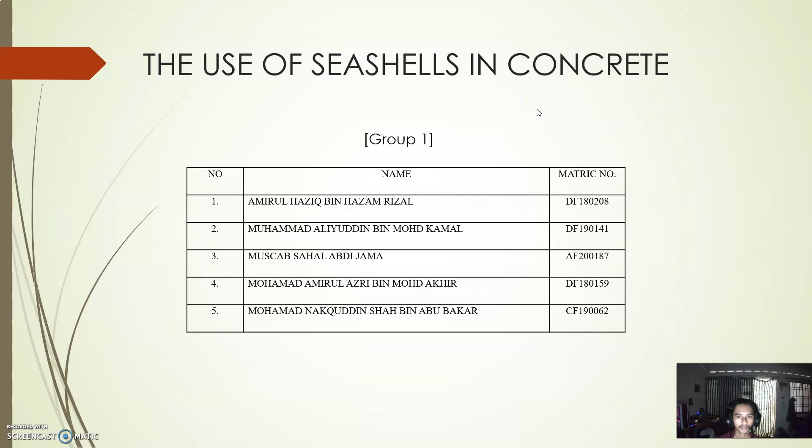For the introduction, concrete is one of the two most used structure materials in construction. Every year, the use of concrete increases by 2 tons for each person. So in order to reduce reliance on raw material in concrete production, green concrete has been promoted.

Green concrete is concrete that has been produced using recycled or waste natural materials. One of the ways to produce green concrete is by using modified cement. Cement is the second largest volume material used by human beings after water. Cement plays the role of a binder, which is a substance that sets and hardens and might bind alternative materials together.

During production of cement and the hydration process of cement, the amount of carbon dioxide emitted by the industry is nearly 900 kg of carbon dioxide for every 1000 kg of cement produced. This carbon dioxide production causes serious environmental damage.

Seashells have high potential for use as partial cement replacement and concrete filler. The calcium carbonate content of the seashell is around 90%, which is comparable to the calcium carbonate content of limestone dust used in Portland cement manufacturing.

Seashell crystal formations are mostly made up of calcite and aragonite, both of which have higher strength and densities than limestone powder, the original material. Furthermore, the particle size of the seashell ranges from 36 to 75 microns, which is comparable to the particle size of Portland cement.

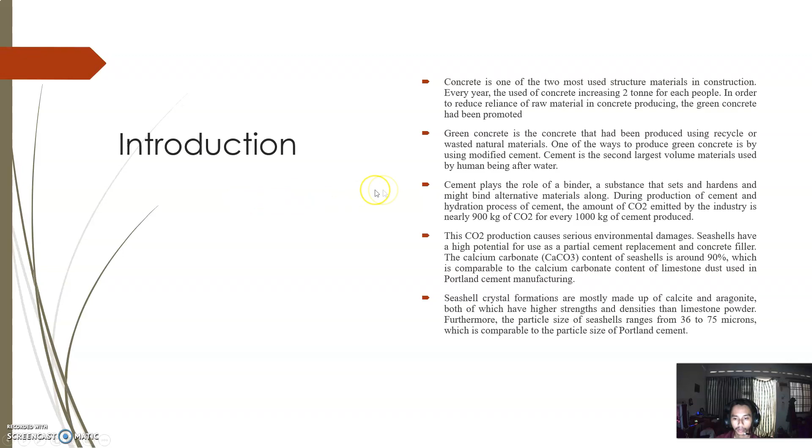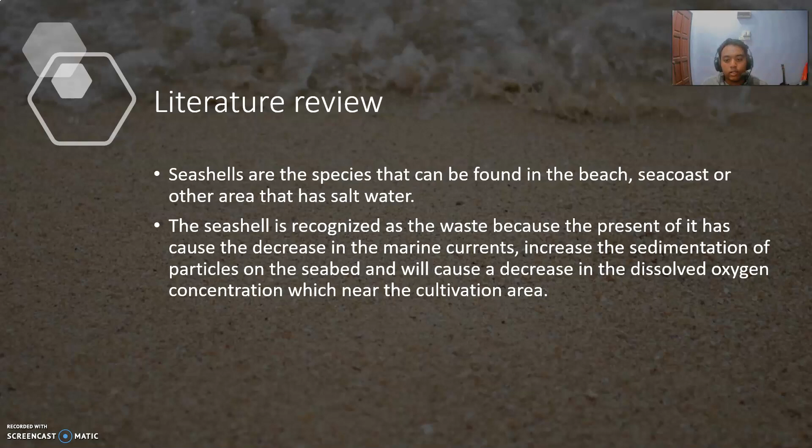Seashells are species that can be found on the beach, seacoast, or other areas that have salt water. The seashell is recognized as waste because its presence has caused a decrease in marine current, increased sedimentation of particles on the seabed, and will cause a decrease in the DO concentration near the cultivation area. So this is most of the waste seashell.

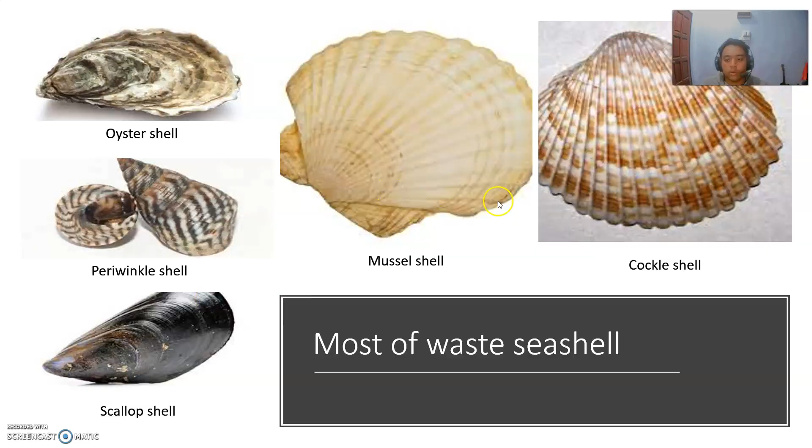It consists of oyster shell, periwinkle shell, scallop shell, mussel shell, and cockle shell. Most developing countries will dump their seashell waste in the landfill or the sea.

If we see in Australia, the disposal of seashell waste can cost up to $150 per ton. And if we look at China, which is currently the largest producer of seashell, they have recorded around 10 million tons of seashell waste which has been disposed in landfills annually.

It consists of oyster, scallop, and mussel shell. This seashell waste mostly will be dumped at the landfill, and only a small percentage will be used back as fertilizer and handicraft. So the bigger problem for this country is it can be seen as illegal dumping.

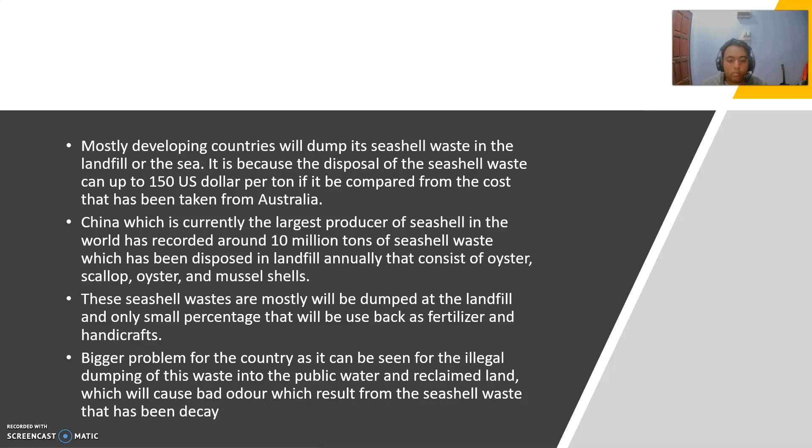Illegal dumping of this waste into public water and reclaimed land, which can cause bad odor resulting from the seashell waste that has decayed.

So this is the seashell chemical composition. The chemical property of the seashell is generally composed of calcium carbonate.

Oyster shell microstructure can be separated into two parts, which is a sheet phase layer and a porous large layer. The function of the sheet phase layer is to enable the growth direction of the seashell. The porous large layer is a layer between the sheet face layers.

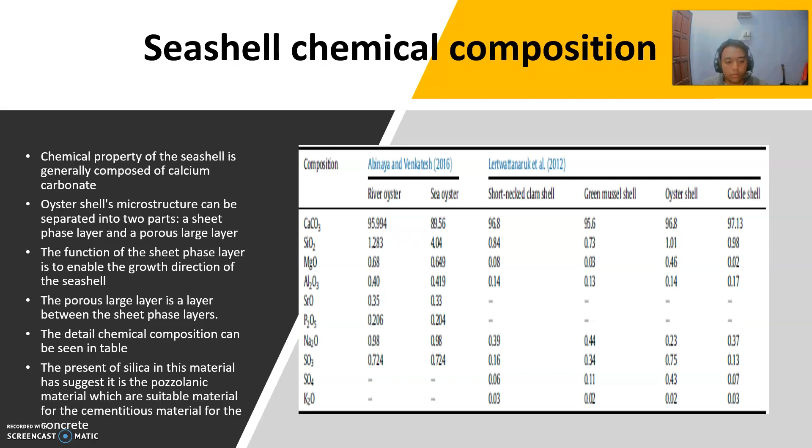As can be seen in this table, this is the detail of the chemical composition of the seashell. As can be seen, the major chemicals in the seashell are calcium carbonate and silicon dioxide. The presence of silica in this material has suggested that it is a pozzolanic material, which is a suitable material for the cementitious material for concrete.

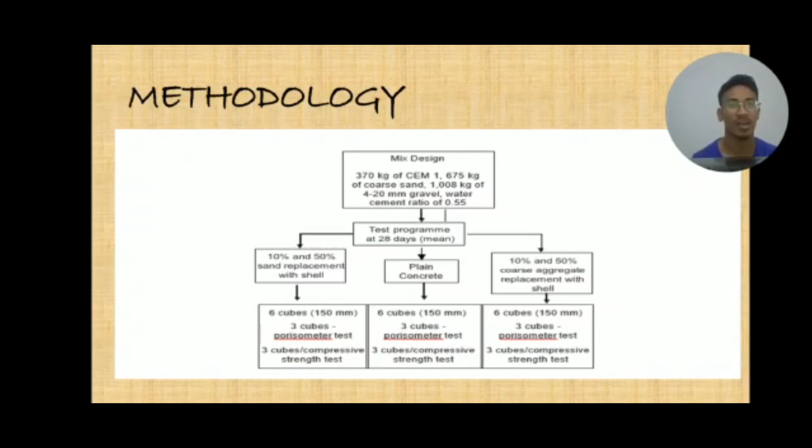The strength and permeability of concrete constructed using seashells were evaluated using a compressive strength test and porosity test. Compressive strength is a widely used criterion for determining the quality of concrete. The porosimeter test involves applying water to the surface of hardened concrete at a pressure of 5 bar in order to determine the depth of penetration and hence the permeability properties of the concrete.

The porosity of the concrete types used had the following standard deviation values: plain was 7.58, 10% aggregate replacement was 5.75, 10% sand replacement was 0.66, 50% sand replacement was 1.58, and 50% aggregate replacement was 1.36. The standard deviation for plain concrete was 7.58, while the standard deviation for 50% aggregate replacement was 1.36.

A modest discrepancy in water penetration between these two concrete samples is partly explained by the scatter in the data. The shell size and amount were the only physical difference between the 50% aggregate replacement and the other concrete types. This could have had a significant impact on the permeability results. The scatter across the different concrete types would be smoothed out with a bigger sample group.

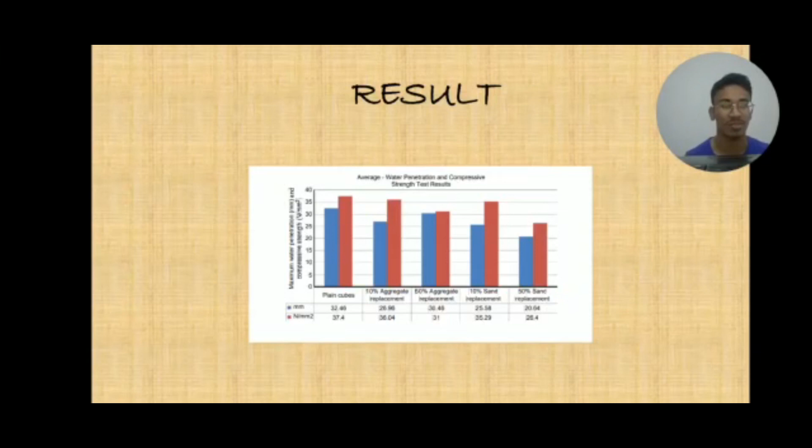Concrete is used for many applications, including basic foundations, superstructures, wastewater treatment facilities, water treatment facilities, parking structures, floor construction, and exterior surfaces. Along with concrete, the form system has evolved to allow for more efficient placement, large quantity placement, and artificial architectural finish features that may be desired. When referring to quality associated with concrete work, it may include the finished appearance, consolidation, or accuracy of the placement. While all of these are important, the quality goes much deeper.

Concrete quality begins at the project conception while specifying appropriate strength required to support the structure, concrete mix design, ingredients, desired finishes, and need to specify work that is constructible. When constructing with concrete, it is vital to properly understand the reinforcing requirements, accessory requirements, desired and achievable strengths, historical data relative to materials being used, proper placement of materials, and tracking of periodic trending strength to ensure design parameters are being met. In addition, strength tolerance for concrete is critical. Consolidation of concrete and reinforcement coverage is paramount to avoid removal.

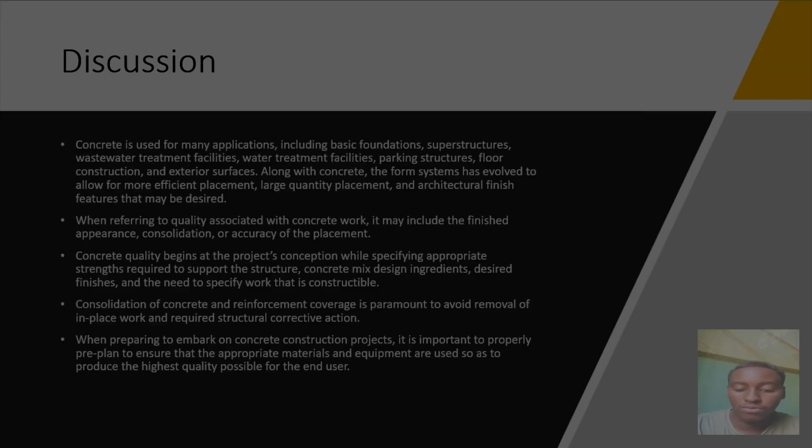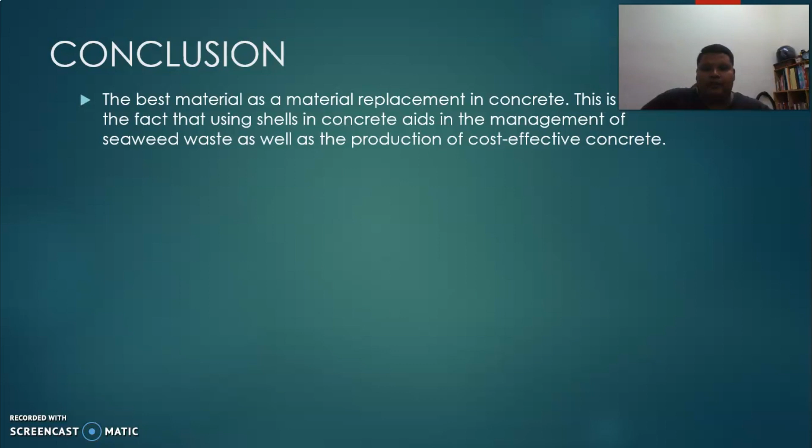Seashell is the best material as a material replacement in concrete. This is due to the fact that using seashells in concrete aids in the management of seaweed waste as well as the production of cost-effective concrete.

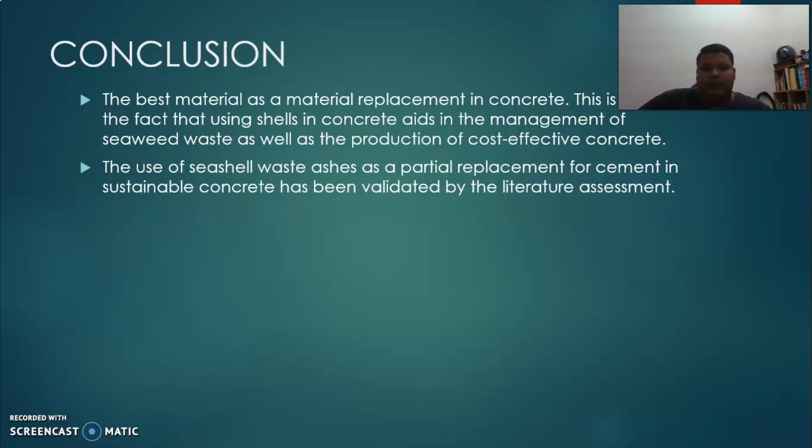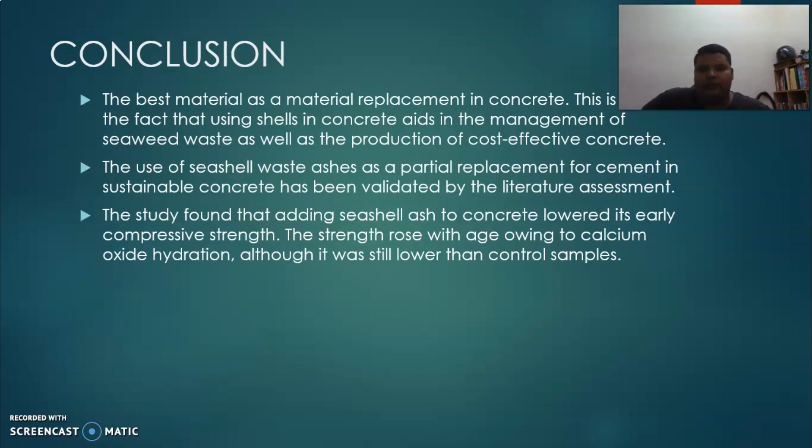The use of seashell waste ash as a partial replacement for cement in sustainable concrete has been validated by the literature assessment. The study found that adding seashell ash to concrete lowered its early compressive strength. The strength raised with age owing to calcium oxide hydration, although it was still lower than control samples. The establishment of excellent bonding between the binder matrix and aggregates enhanced the flexural and splitting tensile strength, which raised the modulus of elasticity.

However, other investigations have found that splitting tensile strength has decreased.